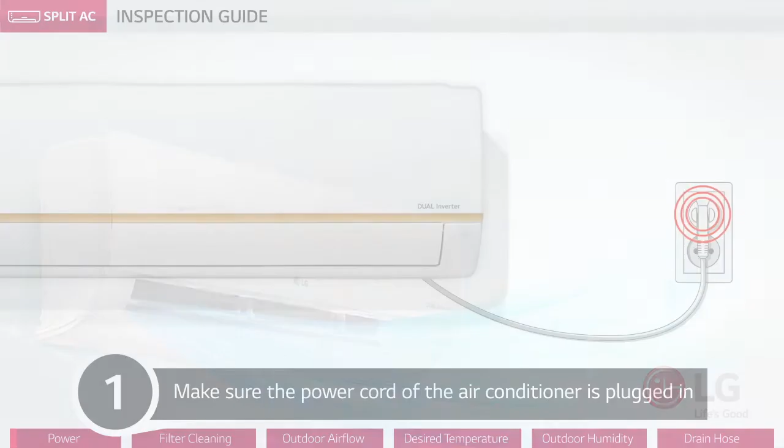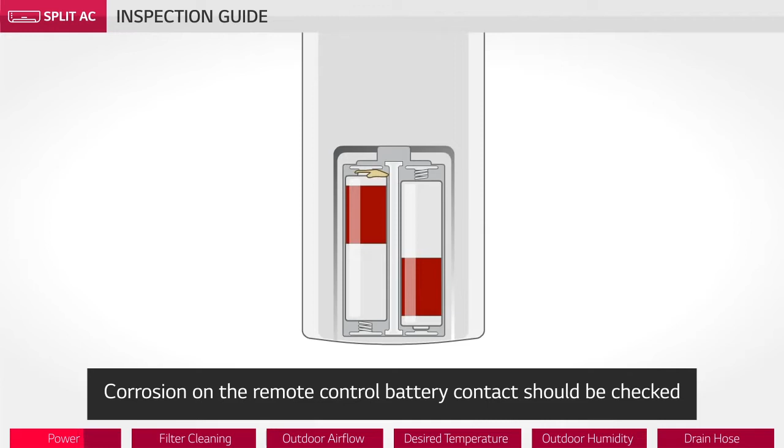First, make sure the power cord of the air conditioner is plugged in. And you need to check the remote control. The remote control battery contact should be checked for corrosion. Batteries should be replaced with new ones instead of the old ones.

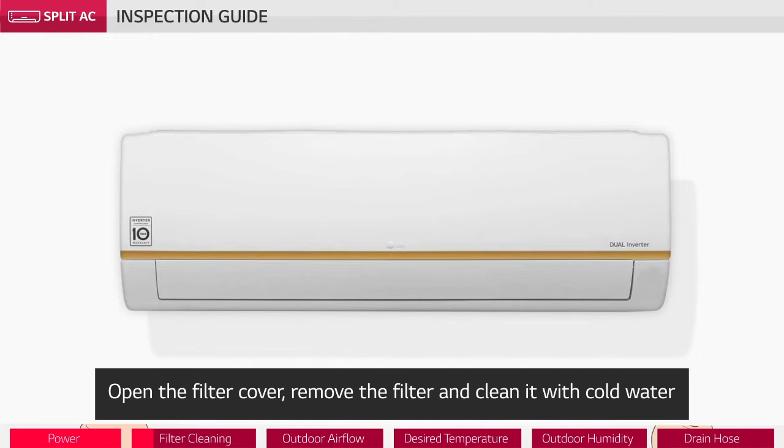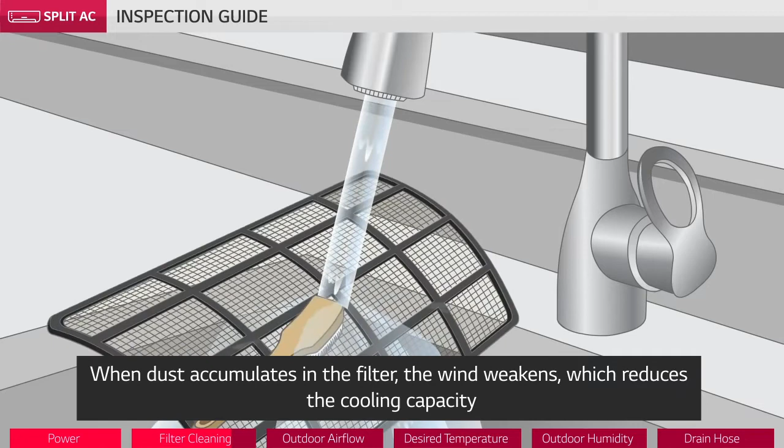Second, clean the filter. Open the filter cover, remove the filter, and clean it with cold water. The wind is weakened when dust accumulates in the filter, which reduces cooling. The electricity cost will be high.

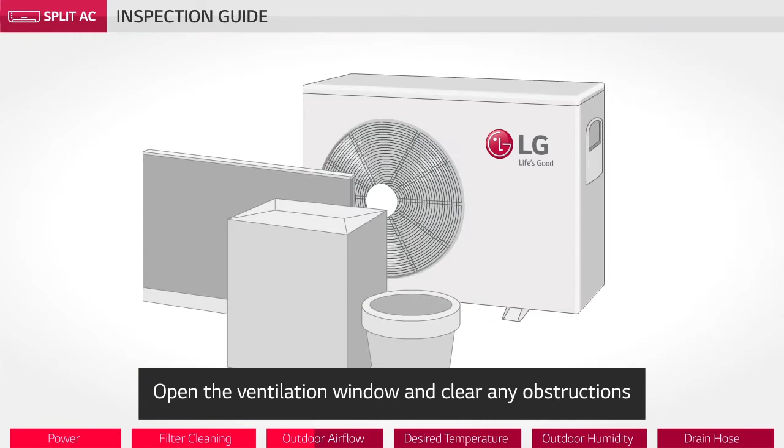Ventilate the area around the outdoor unit. Clear any obstructions from the ventilation window. Having obstacles around the outdoor unit will cause it to use a lot of electricity and malfunction.

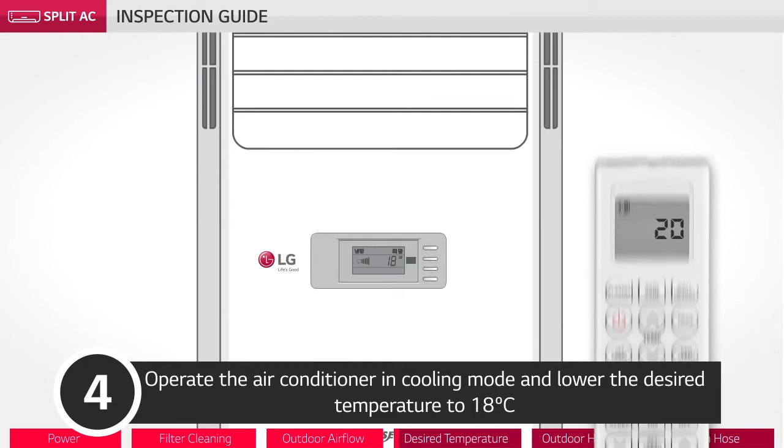Reduce the temperature to 18 degrees Celsius by using the air conditioner in cooling mode. Check the status of the fans indoors and outdoors.

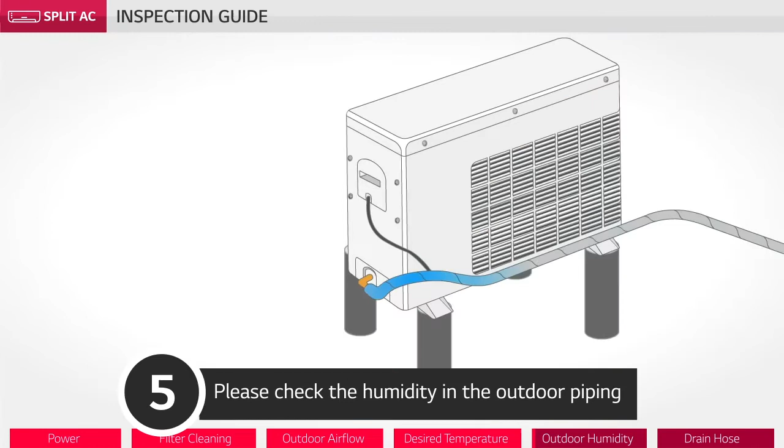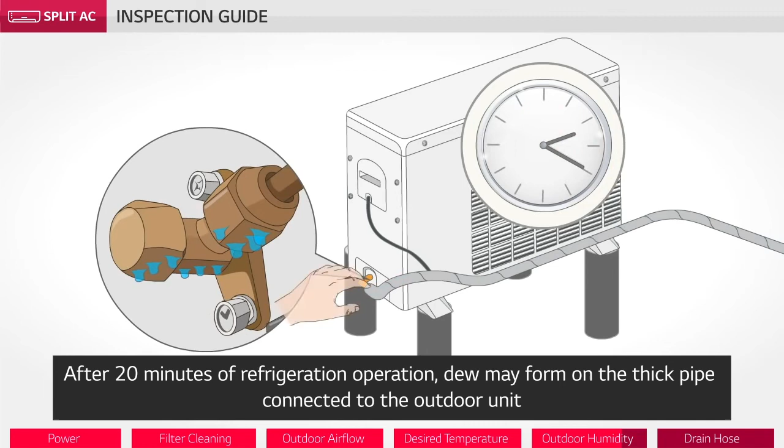Check the humidity in the outdoor piping. When the outdoor unit is operating for 20 minutes, check the thick pipe connected to it. When it is cold to the touch, it is normal.

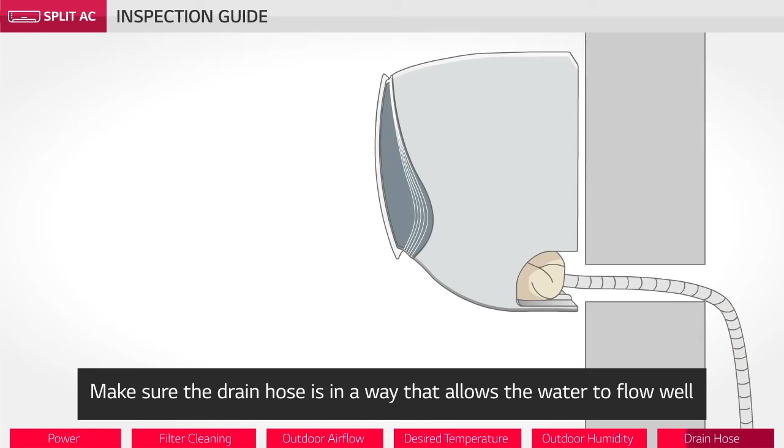And check the drain hose. Water should be able to flow freely through the drain hose. Water will leak from the air conditioner if the hose is curled up or raised. You can purchase a new drain hose at a hardware store if the old one is damaged.